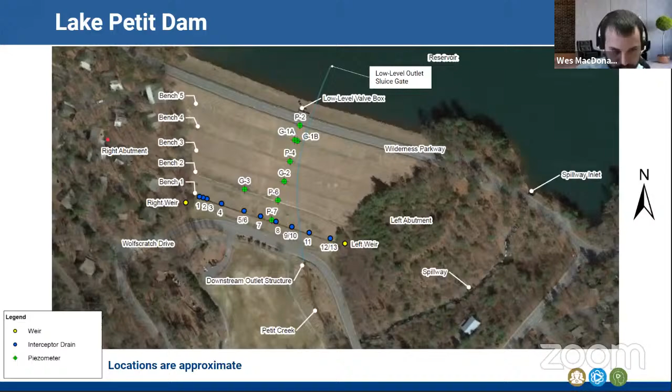The brief history of the dam: it was constructed in 1972. There isn't a lot of what we'd like to see in terms of quality control or construction completion reporting that would record exactly how it was built. We don't have a lot of records on that. In fact, most of what we have are the original design drawings.

However, as we go through this, you'll see we've been collecting data ever since. In 1974 was the first observation of seepage at the downstream face. The downstream would be where those benches are, specifically around bench 1 and 2.

You may have heard there's some seepage now. It's been observed for a while. As I said, interceptor drains were put in around 1976, as far as we can tell, to help mitigate that seepage. We didn't have a ton of records between then and 1997.

In 1997, Georgia Safe Dams program, so you'll see 'Georgia SDP,' is essentially who's in charge of regulating and inspecting dams in the state that aren't otherwise regulated by an entity like FERC, the Federal Energy Regulatory Commission. Dams like Lake Petit are regulated by the Georgia Safe Dam program, along with a set of rules and regulations in the Georgia Code. The Safe Dam programs generally have recommendations that mirror those rules and regulations, a bit more detailed, to help dam owners understand, maintain, and operate their dams safely.

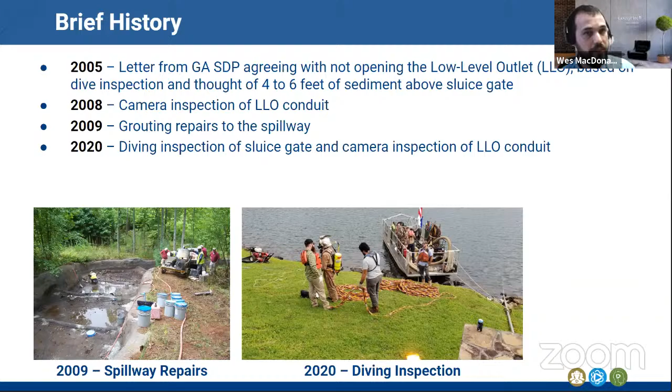If you go to the next slide, in general the findings of the previous stability evaluation I mentioned are still applicable. The regulations of the state haven't changed, and it still meets the current state rules and regulations for the scenarios. In fact, the earthquake loading for this geographic location has gone down since then, probably due to advanced modeling and understanding of seismic conditions, not just here but across the industry nationwide from the USGS. So what that amounts to is the design requires less seismic acceleration, and since it's less, it's still stable under the analyses and requirements done here.

Right now, Big Canoe POA is being very proactive. They brought us in to help them come up with a plan and be the dam safety group, to advise on what needs to be done, proactive things to continue operation and maintenance of the dam. As a result, we've created a long-term plan that we'll go over here, the specific items in general, subject to change based on some of our findings. It includes schedules and costs, and we gave some categories relative ratings for importance. So with that, we can jump right in. This is the schedule. I'm going to go year by year in terms of what we're trying to get done. There are many things in 2021, so I'll try to hit them all at a high level.

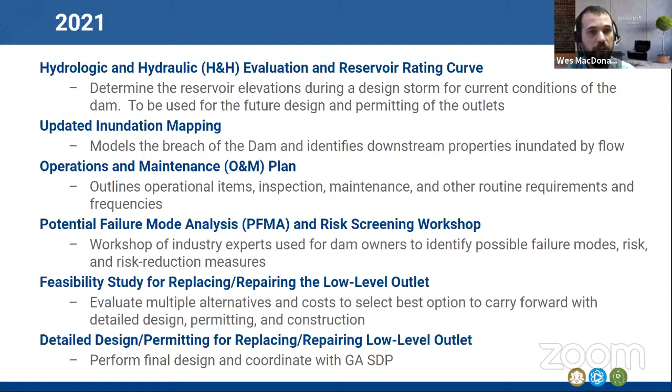And so that's a public list that's online that lists those people that have achieved that approval from the Georgia Safe Dam Program. So it's a lot of records you have to sit in and justify your experience specifically in the dam arena.

From that, while that design is going on, the design and permitting is expected to take a while, just because we know Georgia Safe Dams is backed up in terms of backlog. It's an unknown in terms of how long, once we get that done, they will get things through. So I think we've assumed about 1.5 years for those types of activities, getting the permitting done.

So while that's going on, we want to have something in the meantime to be able to lower the reservoir just in case it's needed. And so we'll create a plan for that based on some temporary things. Maybe it's some piping or siphons, something quick.

It might be bringing in some pumps, but that will be directly corresponding to the H&H to understand how these rain events will come in. And also it gives us an understanding of the storage in the reservoir, how much water's there, and we can figure out how long it takes to lower it from that. So those two will go kind of in series.

The next item is a threshold calculation package for the downstream piezometers. I talked about the piezometers out there, and we are taking readings on those. Now we're doing it quarterly and checking those levels. What hasn't been done in the past is a typical procedure is to calculate a value for those piezometers that represent a certain factor of safety.

And I've mentioned that a couple times, but a factor of safety is generally a ratio of your things that want you to fail versus the things that want you to restore. And when it's at 1, everything's balanced and it's on the verge of failure. And you always want your factor of safety to be above 1.

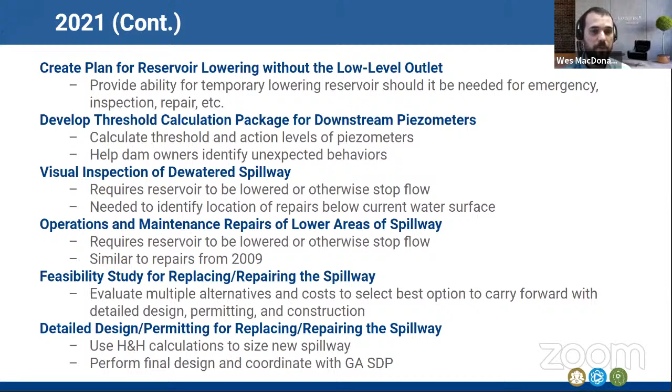And then that will turn into detailed design late in this year. And again, coordinating that — the key here is we want to get with Georgia Safe Dams and talk to them about that, so they're aware of what's coming, so we can do things quicker if needed, and also get their buy-in in terms of review.

Another item here is the design and permitting of the upstream riprap protection. If anybody's been out there, there's the reservoir right along the face of the dam. We're just recommending that gets replaced. And that's a good opportunity to start our conversation with the Georgia Safe Dam program. So we'll be getting with them and talking through this in terms of how they see it. And so there may be some little work going on down there after that design and permitting is done, depending on the duration of that permit.

I mentioned the interceptor drains on the downstream face. We get in there and replace any that need replacing, so drainage is maintained into those concrete ditches. The non-functioning interceptor drains, the concrete weirs, and the concrete channels are all tied together in that same area on bench 1. The idea is to replace those all as one, since the channels have cracked and spalled over time, to make sure water gets off the dam and doesn't go back into it.

The weirs are important to quantitatively measure the amount of flow and make sure it's not changing drastically. Right now the ones out there are a little hard to use and take some maintenance when we come out to clean them and things like that. So all those things I think we'll be able to do probably after the summer period.

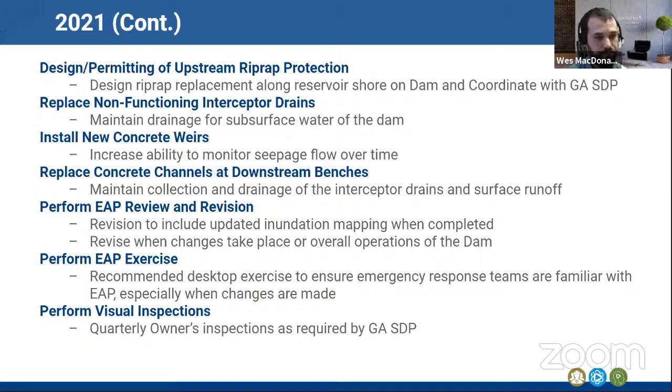So we have one spot for anybody that's coming out. The intent is just so somebody who needs to come in and learn something real quick about it has a volume - that's for experts responding to emergency situations.

All right, 2023 gets a little busier. It's when we start some of the construction of the low-level outlet and the spillway. But another item we threw in here, just in case it's needed for design, is we may need to get out and do some field investigation, some drilling to get extra data for the design components.

So that would be geotechnical borings and lab testing for soils out there. And as I mentioned, ideally we'll be completing the permitting for the low-level outlet and spillway and then rolling into construction. So the costs right now for those are high-level approximations. During feasibility and going into detailed design, we'll be able to refine those costs a lot more.

For both of these options, it'll likely require the reservoir to be lowered. And we don't know the depth at this point because we don't know the technology or methodology that will be installed to replace the low-level outlet and the spillway.

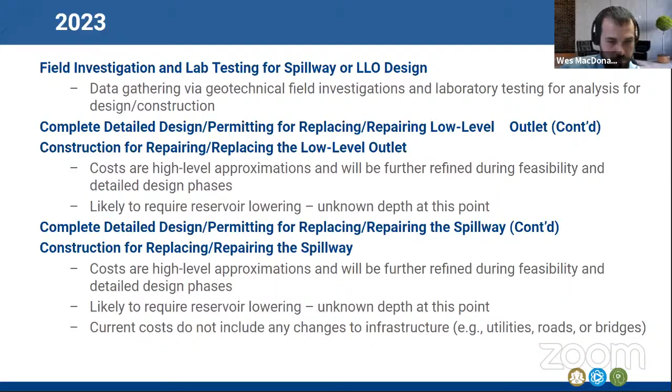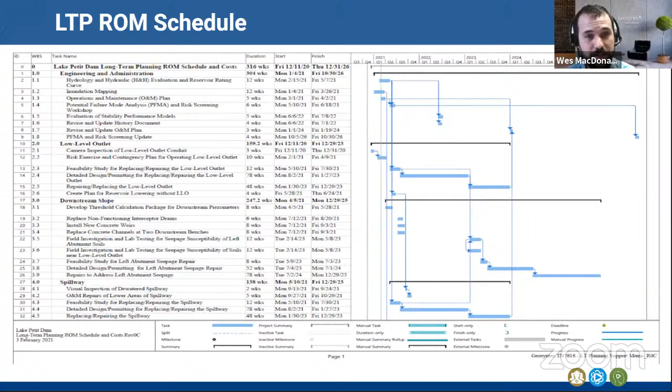Thanks, Wes. I appreciate that. That's a wonderful analysis you gave us. I'm not sure I totally understood all of it, but then again, I don't think anybody that watched this understood all of it. But I'm glad we've got you as a partner because you apparently do understand it.

I think the first comment I'd like to make is after 50 years, it's probably time to readdress what it is we're doing. This Lake Petit was created as a central part of Big Canoe 50 years ago, and like about anything else you build, whether it's a building or a lake or a dam, it's time to address the redo of this dam. I applaud the board and management for bringing this to our attention and saying we're not going to kick the can down the road any further.

We're going to address this now and take, quote unquote, the bull by the horns. So having said that, the $64 question is, what's it cost? Well, what you have on the screen in front of you right now is what it costs. We're going to spend over the next 5 years $4,125,000. Wes has already said it could be more, it could be less. The answer to both those questions is yes.